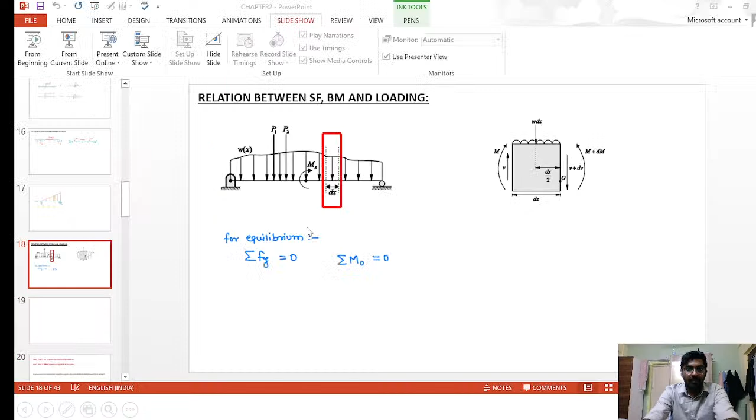You can proceed now. Don't mind. Why?

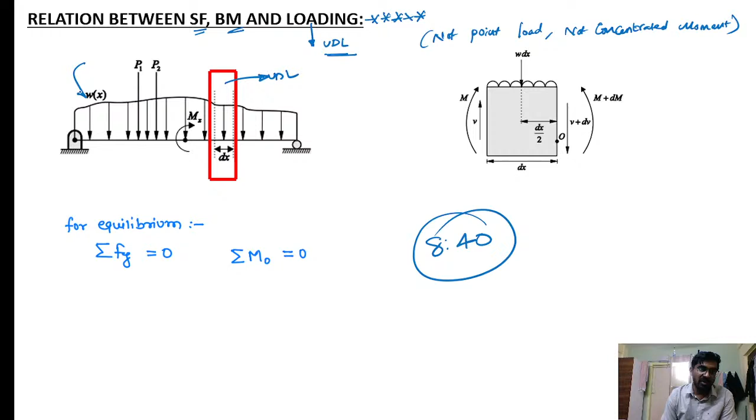I am considering only UDL. I am considering a beam with some load on it - UDL, or some varying load. Let us consider some varying load. In this beam I am considering a small strip, a very small strip, and magnifying it. This is the strip of length dx, subjected to UDL.

What is the total load? Total load is nothing but W into intensity of loading into length. What is the length of the strip? dx. Where will it act? It acts at the CG, at a distance of L by 2. Here what is L by 2? The length here is dx, therefore dx by 2.

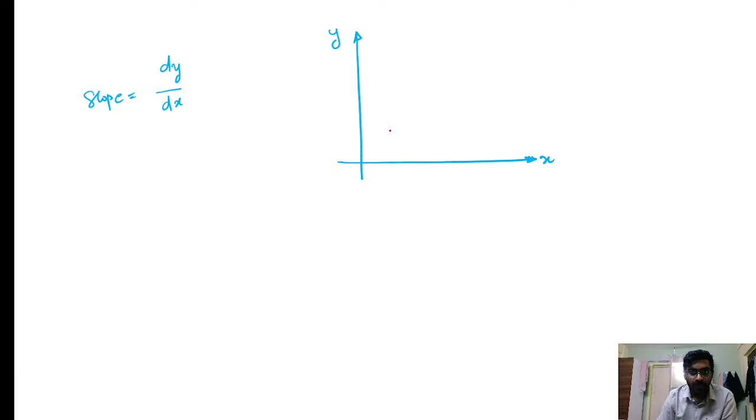If you consider any curve in the xy plane, with this as x direction and this as y direction, if you consider any curve, some function of x, the slope of the curve at any point with respect to the horizontal, this slope theta equals dy by dx. In the denominator we have x, so we are measuring the angle with x, which is nothing but horizontal.

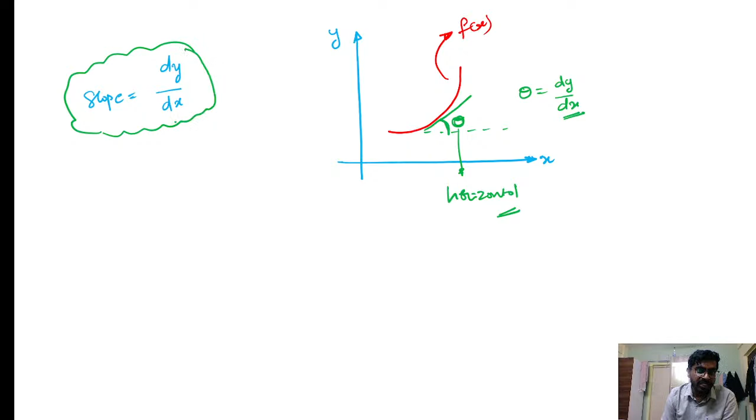So slope is indicated by differentiation. Differentiation indicates slope, integration indicates area under the curve. For the same curve, if I integrate from x1 to x2, if this is x2, integrating the function f of x from x1 to x2 gives the area under the curve - this area. So this is the meaning of integration: integration of any function gives area under the curve, differentiation of any function gives slope at a particular point. This is the meaning of differentiation and integration.

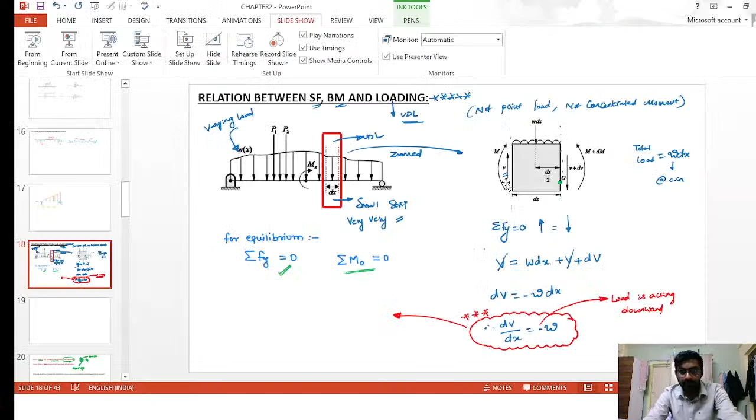Now what are we considering? We are considering the moment about O should be equals to 0. Why it should be equals to 0? Because beam is in equilibrium position, therefore it should satisfy the equilibrium conditions.

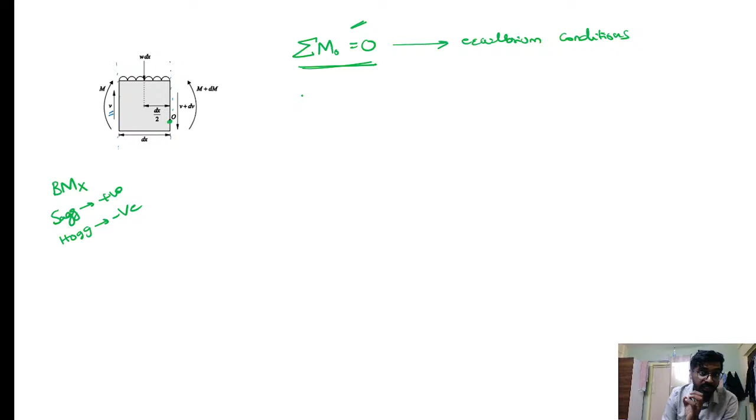Whenever I am taking moment equals to 0, if I am calculating moment at a section, bending moment at a section, then I should consider sagging moment as positive. Whenever I am considering moment equals to 0, I should take anti-clockwise negative, clockwise positive.

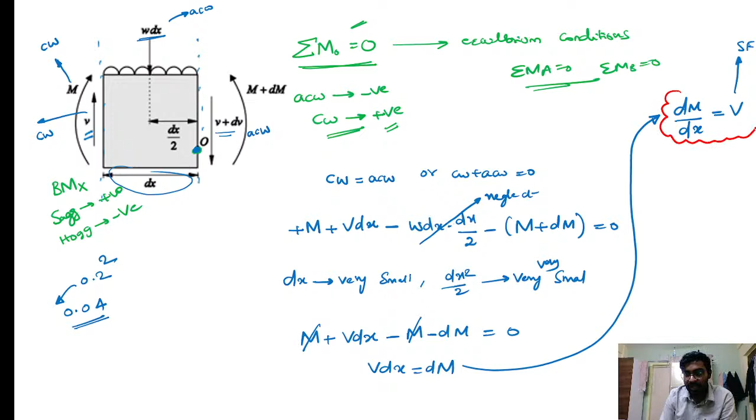This is also very important equation. Let's see what this signifies.

dM by dx, nothing but slope of bending moment diagram, is equals to magnitude of shear force. This is nothing but slope of bending moment diagram is equals to magnitude of shear force.

These two conclusions say: slope of shear force diagram is equals to intensity of distributed load, and slope of bending moment at any section is equals to shear force at that section.

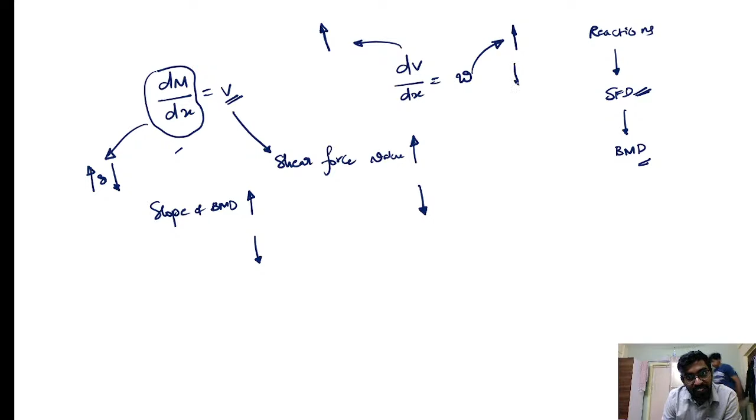Similarly, if load value is increasing, definitely slope of shear force diagram should also increase. If load value is decreasing, slope also should decrease.

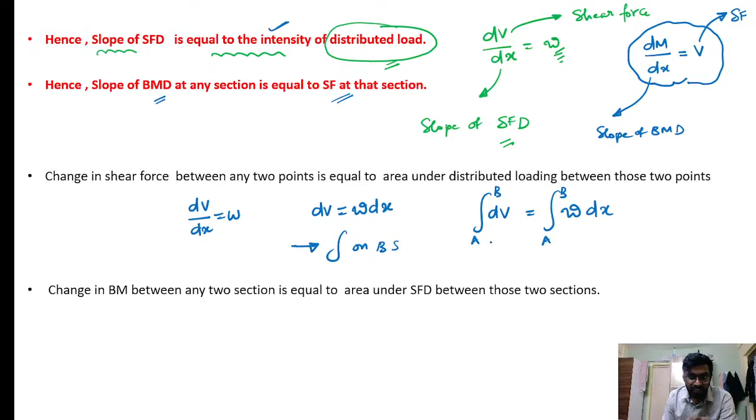Observe, distance of L by 2. This is point A, this is point B. Integral A to B dV is equal to integral A to B W into dx. This is nothing but VB minus VA is equals to integral A to B W into dx.

This is the area of loading diagram between A to B. Area of loading diagram is nothing but, what is the area of loading diagram between A to B? W into L by 2.

And what is the shear force value at B? WL by 2. What is the shear force at L by 2? 0 minus 0. Therefore WL by 2 is equals to WL by 2.

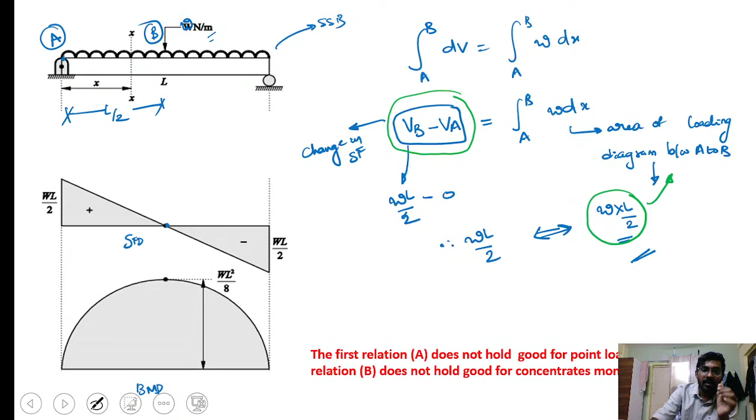I'll explain. First, I am considering the 2 points. This is A, this is B. B is at a distance of L by 2.

What do I mean? Integral dm from A to B is equals to integral V dx from A to B. This is the area of shear force diagram between A and B. This is the A point, this is the B point, this is the triangle.

Therefore what is the area? Half into base into height. What is the base? Base is nothing but L by 2, into, what is the height? WL by 2. Finally we are going to get WL square by 8.

This is the difference MB minus MA. What is the moment at A? 0. What is the moment at B? WL square by 8. I'll explain how this value came.

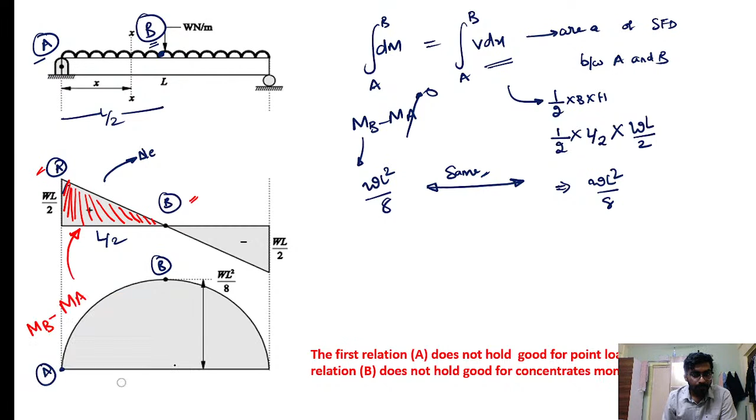Okay, so these above relations A and B does not hold good for point load and the concentrated moment. These two equations will be valid only for uniformly distributed load.

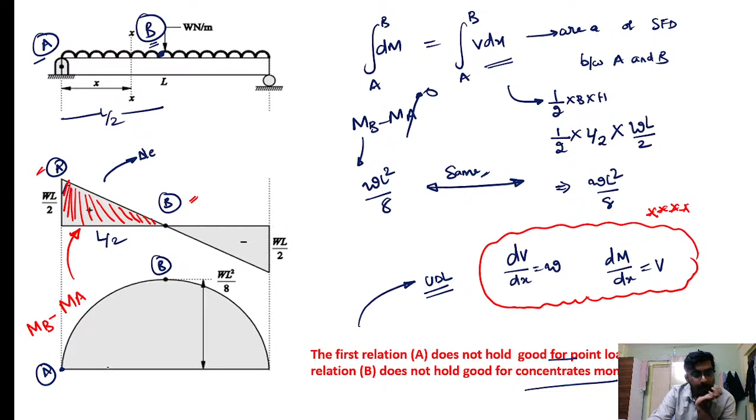dv by dx is equal to intensity of loading. What is the intensity of loading here? Intensity of loading is constant. W is constant throughout the beam.

If loading is like this, intensity of load is increasing constantly, increasing uniformly or varying uniformly. But here intensity of loading, if you consider anywhere, here also W per meter, anywhere intensity of loading is W per meter. So therefore this is constant.

Therefore slope of shear force diagram must be also constant. See, when does a constant slope occur for us?

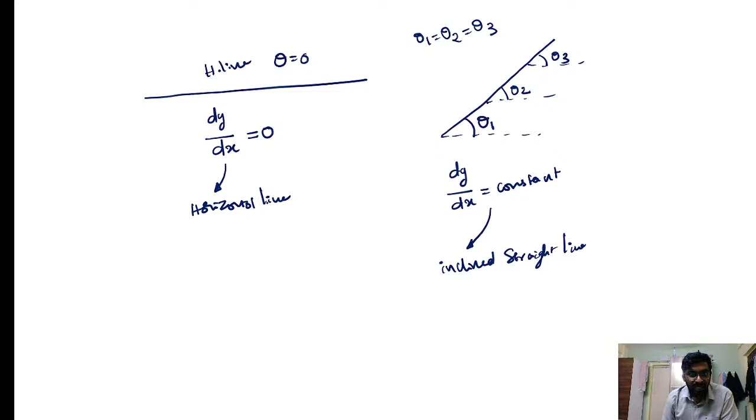Therefore slope of this line, for example, if this is constant, slope is constant, then it indicates an inclined straight line. If slope is 0, then it indicates a horizontal straight line.

For example, if slope is changing, dy by dx, if this is rising, this is the positive constant. If here theta 3, here theta 2, here theta 1, theta 1 is equal to theta 2, therefore this is also constant slope but negative. Negative indicates falling, positive indicates rising.

And if dy/dx is not constant, for example if it is changing, then it should be a curve. If I consider one curve, this curve is making an angle with horizontal of some theta 1. Here it is making some angle theta 2. Here it is making some angle theta 3. Theta 1 is not equal to theta 2 is not equal to theta 3.

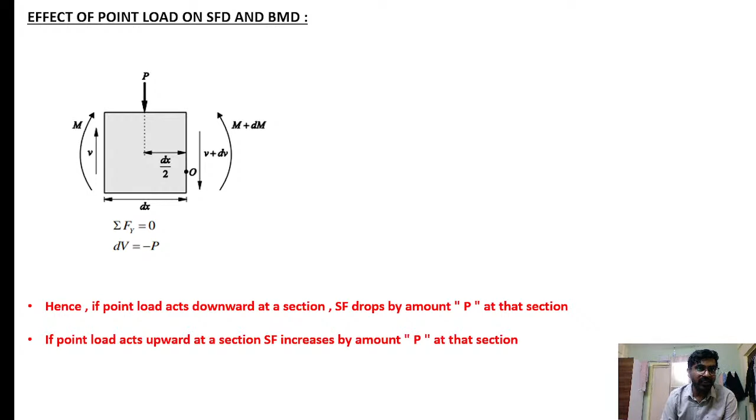From the same beam, I am considering a small element dx, but here I am applying a point load. So whenever we apply transverse loading, shear force and bending moment develop. Whenever we change the section, bending moment also changes. Since I don't know the change, I assumed it as dM; shear force also changes, and since I don't know how much it changes, I assumed it as plus dV. If I consider sigma Fy equals 0, that is downward forces equals upward forces.

What are the upward forces? V. What are the downward forces? P plus V plus dV. V gets cancelled. dV is equal to minus P.

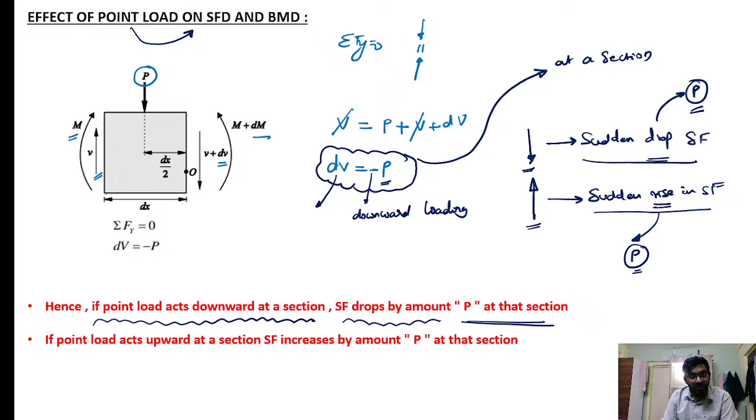Whatever is the point load acting at that point, the magnitude of rise or fall should be equal to the magnitude of the point load acting at that point. This is the effect of point load on shear force diagram - that's done. Now we are going to study the effect of point load on bending moment diagram.

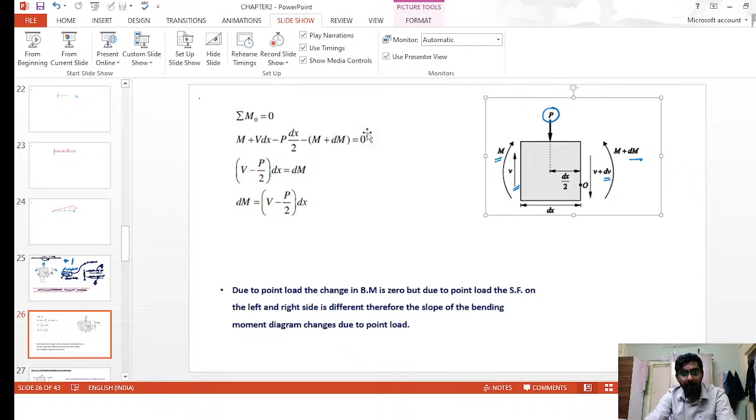I am taking moment about point O to be 0. This is the point O. This M is acting in clockwise direction. This V is also causing a moment in clockwise direction. This P is causing a moment in anti-clockwise direction.

This M plus dM is also causing a moment in anti-clockwise direction. So finally, the equation becomes: since M is acting clockwise, I am considering plus V into dx minus P into dx by 2 minus M plus dm equals 0.

Why am I not considering the effect of this shear force V plus dV? The shear force is acting through the point O, so therefore the perpendicular distance is 0. Therefore I am ignoring this V plus dV.

If I simplify this: M plus V dx minus P dx by 2 minus M minus dm equals 0. M gets cancelled. V minus P by 2 into dx equals dm. As dx value is very small, I am neglecting this. Therefore finally I get dm is equal to 0.

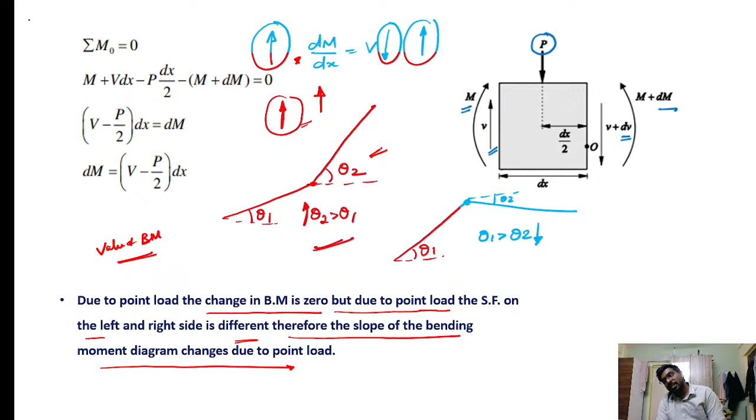Now let us study the effect of concentrated moment on the shear force diagram and bending moment diagram. See, let us assume the same section, but now it is subjected to some concentrated moment M naught in a clockwise direction. So due to the moment, some shear force and some moment will develop.

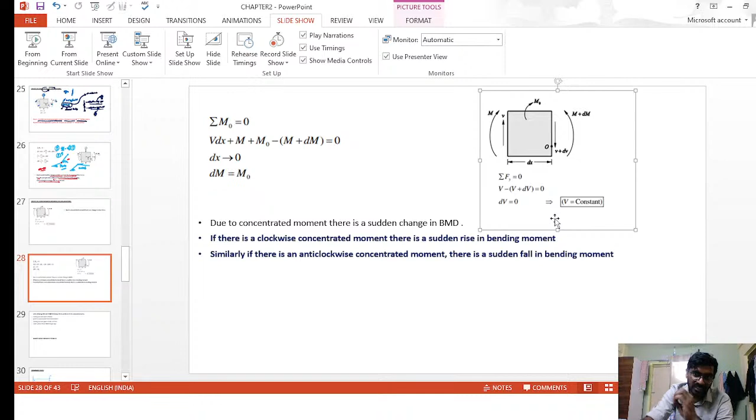See, these derivations are not at all important. Whatever conclusion we are getting finally is very important to draw the shear force and bending moment diagrams.

See, I am considering the moment about point O is 0. Let us take anti-clockwise moments as negative and clockwise moments as positive. This M is clockwise, this M naught is clockwise, this is anti-clockwise, this is causing clockwise moment, but the perpendicular distance of V plus dV is 0.

Perpendicular distance is 0, therefore it is not causing any moment. Considering moment about point O to be 0: this is causing clockwise moment, so plus M, this is causing plus clockwise moment, so plus V into dx, and this is also clockwise plus M naught, this is anti-clockwise minus M plus dm is equals to 0. Therefore M minus M will get cancelled. V dx plus M naught minus dm is equals to 0. As dx is very small, I am ignoring this term. So finally, dm is equals to M naught.

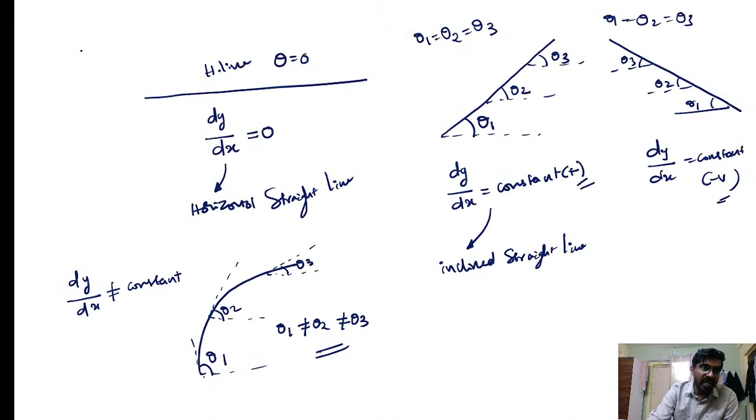First conclusion is slope of shear force diagram is equal to intensity of loading. What is the second conclusion? Slope of bending moment diagram is equals to magnitude of shear force.

And due to point load there is a sudden rise or sudden fall due to upward point load. This is due to downward point load. How much rise, how much fall happens - that fall will be equals to P due. So there is a sudden rise or fall in shear force diagram.

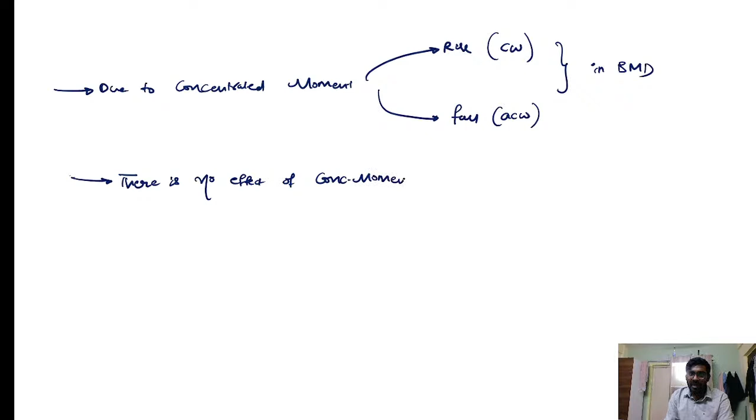There is no effect of bending moment due to point load, and due to concentrated moment there will be sudden rise or there will be sudden fall. This is due to clockwise moment, this is due to anti-clockwise moment in bending moment diagram, and there is no effect of concentrated moment on shear force diagram.

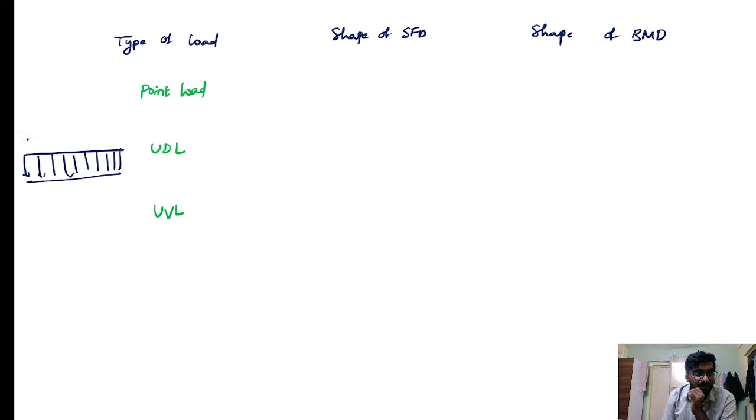See, UDL - what is UDL? This is a constant line, so it's constant. So what is the degree? Y is equals to... let me say it like this. What is the equation of this line? X is equal to 0. What is the equation of this line? Y is equal to 0. So for us, UDL is also a straight line, so this degree can be remembered as 0.

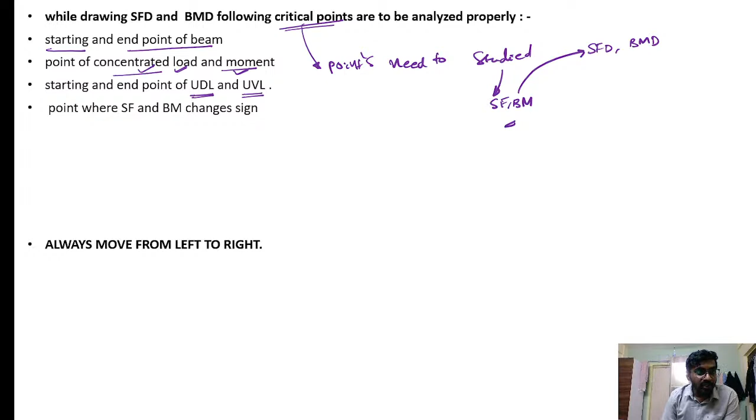Also starting and ending of UDL and UVL, and also the point where shear force and bending moment changes sign. This point is used to find where the bending moment is maximum.

It will also help us to find the point of contraflexure and point of inflection. How, we will discuss all these things in the problems.

You just note down: always move from left to right, left to right.

If a force is acting upward, then shear force is positive. If a force is acting downward, shear force is negative. If a force is acting upward, it will cause sagging moment, and sagging moment is positive. If a force is acting downward, it will cause hogging moment, and it is negative. These are the sign conventions.

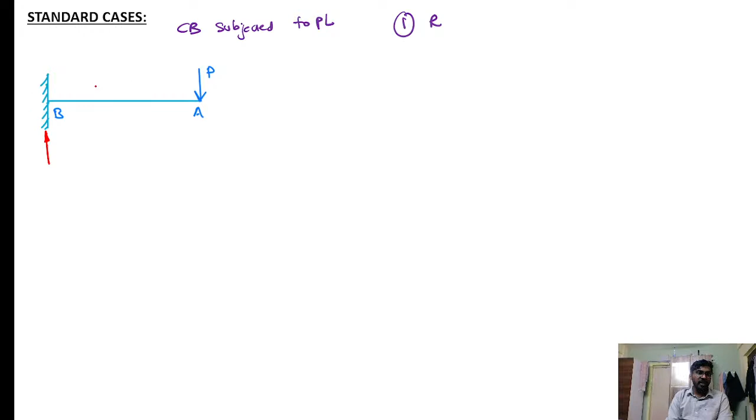Horizontal reaction will be 0, because there is no horizontal loading. This P load will try to cause the moment in this direction, so reaction should develop to oppose the moment developed.

This is the moment reaction, this is the vertical reaction. First step will be determining the reaction. Let us consider sigma Fy equals 0, this is the y direction, this is the x direction. Downward forces equal upward forces. What is the upward force? Reaction at B should equal the downward force P. Therefore vertical reaction at B equals P.

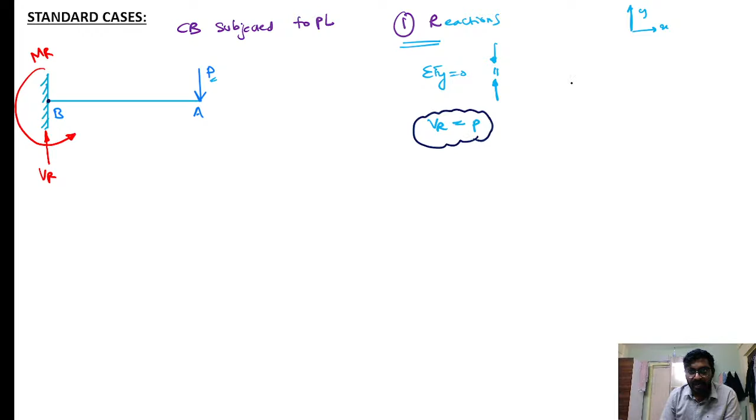To determine the moment reaction at B, I am taking the moment at B to be 0.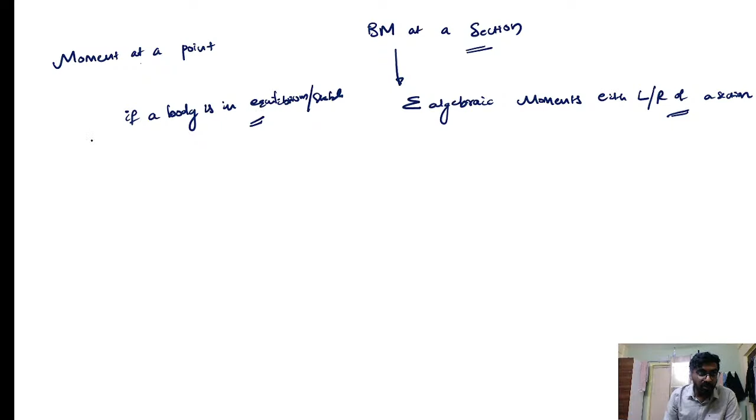What is the bending moment at a point? If a body is in equilibrium, if a member is stable, meaning it doesn't move left, right, top, bottom, and doesn't rotate, then that body is in equilibrium. For an equilibrium body, moment at a point should always be 0.

So this will consider all the forces causing the movement, and clockwise moments are considered positive, anti-clockwise moments are considered negative. But whenever we discuss bending moment at a section, we consider only either left of the section or right of the section. So this is the difference between bending moment at a section and bending moment at a point.

Now I am considering bending moment at point B to be 0, then clockwise moments. Why am I considering the beam is in equilibrium? Whenever the beam is in equilibrium, wherever you take, moment at a point should be 0. So clockwise moments

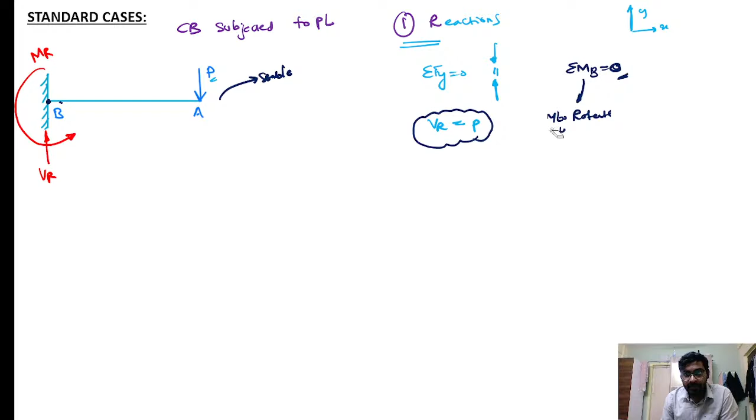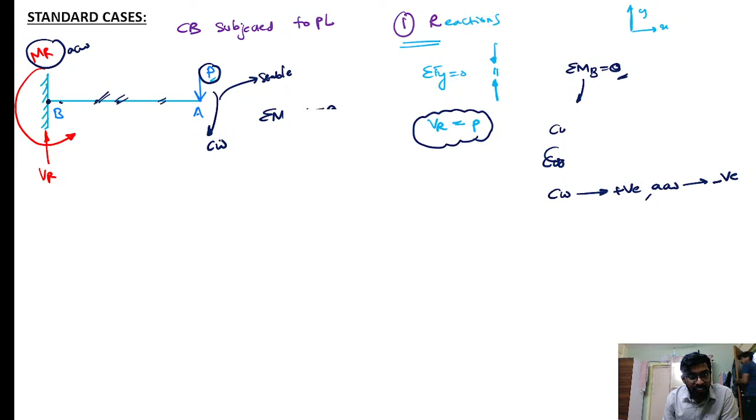positive, anti-clockwise moments negative. This P is causing clockwise moment, and this moment of resistance is in anti-clockwise direction. Therefore, what is the clockwise moment? P into the length, this is the length L. So clockwise moment P into L is equal to anti-clockwise moment of resistance. Therefore, moment reaction at B equals P into L.

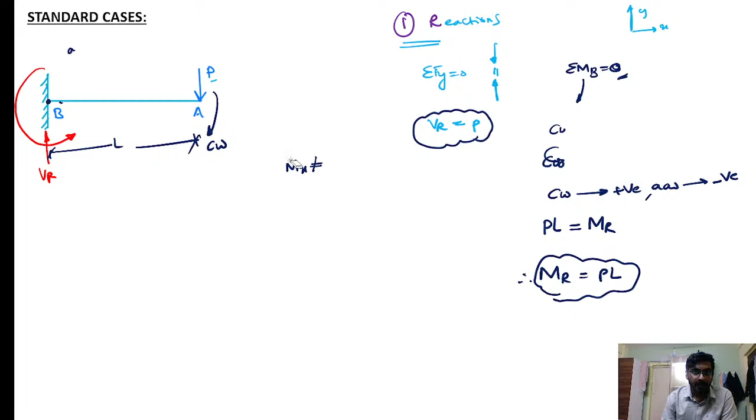This is the reactions. What is the value of vertical reaction? The value of vertical reaction is P. Moment reaction is equal to P into L.

Now, how am I going to draw the shear force diagram and bending moment diagram? At the starting point, we determine the reaction values and bending moment values. At the point load, at critical points, bending moment is discussed. Let me show how I am going to draw the shear force diagram and bending moment diagram.

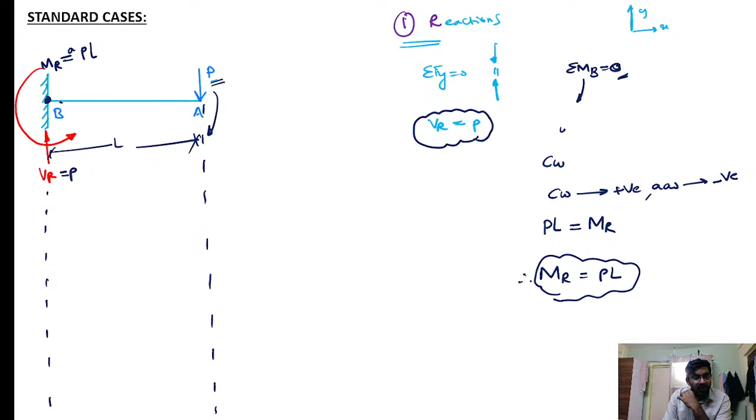Let us consider this a reference. Shear force is 0. Will there be any effect of concentrated moment on the shear force diagram? No, there is no effect of concentrated moment on the shear force diagram. But at point B, there is a vertical reaction acting upward, therefore the shear force diagram will rise.

What is the rise value? What is the magnitude of the load? P. Therefore, the rise is also P. From B to A, is there any load? No load between point loads. Therefore, there will be no change in shear force, so the shear force will be constant.

At point A, point load is acting downward. Due to this downward point load, shear force should fall suddenly. What is the fall? It should be equal to P. Therefore, it falls suddenly and becomes 0. This is the positive shear force diagram.

Now let's see how I am going to draw the bending moment diagram. This is the reference where bending moment is 0.

See how I am going to draw. What is the direction of the moment acting at point B?

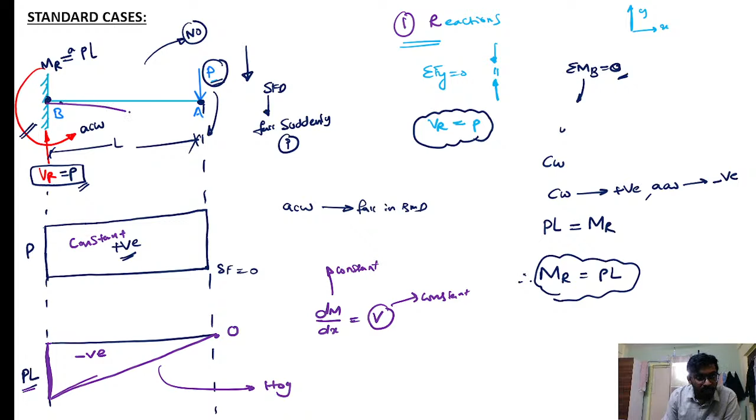So this is the negative bending moment. Negative bending moment will indicate what? Hogging. See, this beam is trying to hog. Therefore, bending moment is also negative, and negative bending moment is hogging. This is the way how we are going to draw shear force and bending moment diagrams.

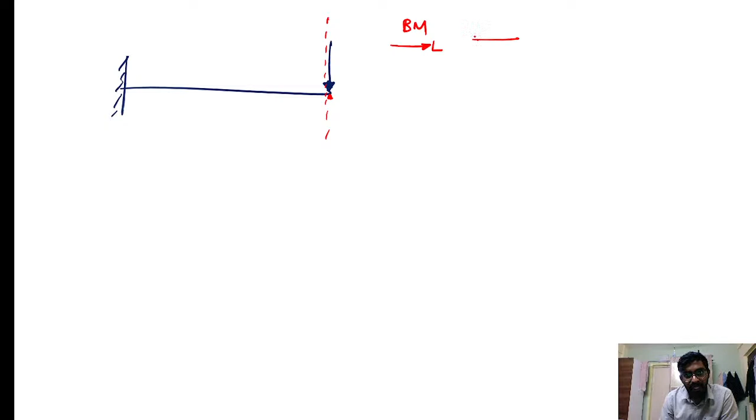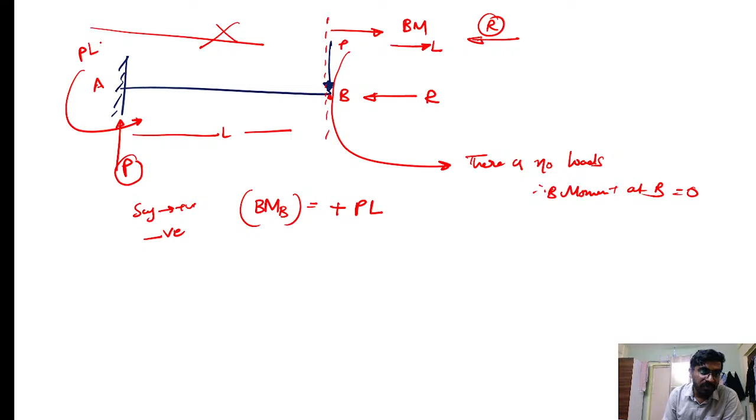See, I told you, whenever you are coming from left to right, an upward force will always cause a sagging moment that will be positive. P into, what is the distance? The distance is L, therefore PL. This PL moment reaction will try to cause the hogging bending moment. Therefore, I am taking minus PL. Therefore, bending moment at point B is 0. Therefore, always bending moment at the free end should be 0.

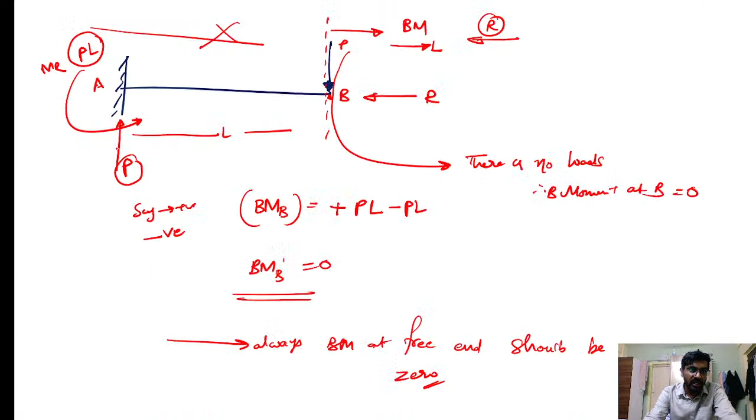You remember this? So from the next problem onwards, I am going to take directly bending moment at a free end should be 0. See, let us observe the next case, next example.

See, what are the reactions developing? Here is one vertical reaction, and this loading will try to cause the movement in clockwise direction. So the reaction should develop. Reactions always develop to oppose the effect of loading. The effect of loading is causing clockwise movement. So reaction should develop anti-clockwise to counteract the effect of loading. Therefore, this is the reaction.

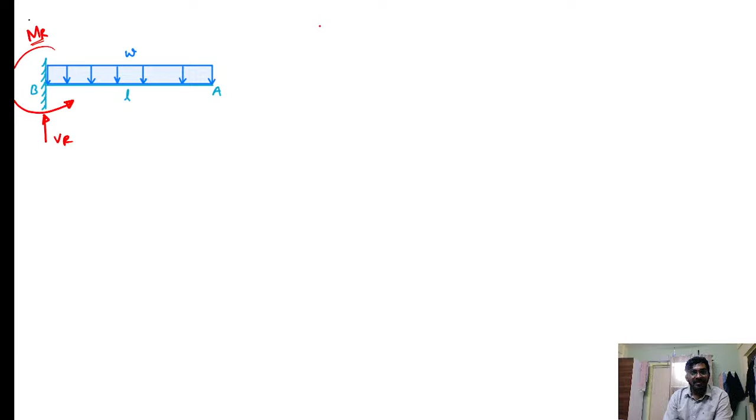Moment develops MR, a reaction. This is the moment reaction, and this is the vertical reaction. So to calculate the reactions, sigma Fy is equal to 0. Upward forces must be equal to downward forces. What is the upward force? VR. So upward force VR equals to the total downward force, that is equal to the area of UDL. What is the area of UDL? Intensity of the loading into length. Therefore, vertical reaction is equal to W into L.

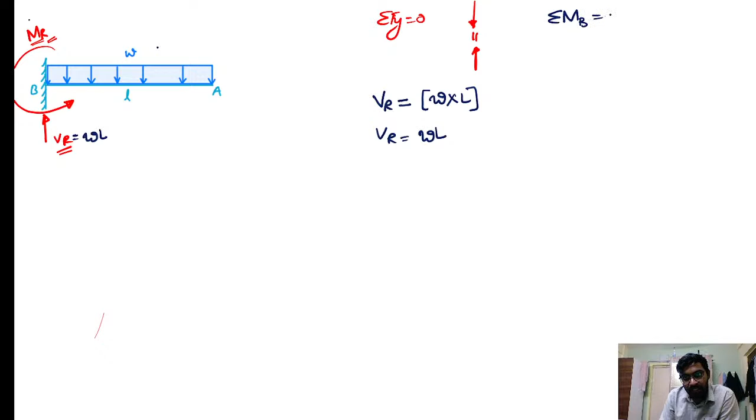Let us consider this. This is acting in anti-clockwise direction. This load is causing clockwise movement. What is the clockwise movement? What is the total load? W into L. This total load will act at the CG.

This distance will be at a distance of L by 2. Why it is L by 2, I already discussed in the previous class. So I am taking it as L by 2.

This is plus, so this reaction is acting anti-clockwise. So I am taking minus MR equals to 0. So moment reaction is equals to WL square by 2, which equals WL square by 2. See how I am going to draw the shear force diagram and bending moment diagram.

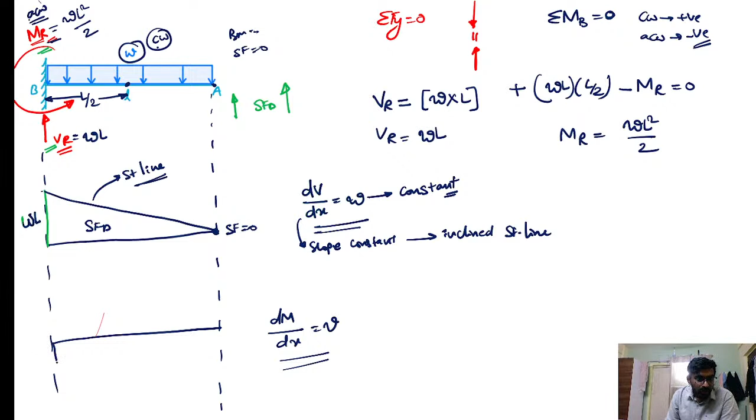Now let's see the shape of the bending moment diagram. A concentrated moment is acting at point B, which is acting in anti-clockwise direction. So there should be a sudden fall of magnitude WL square by 2.

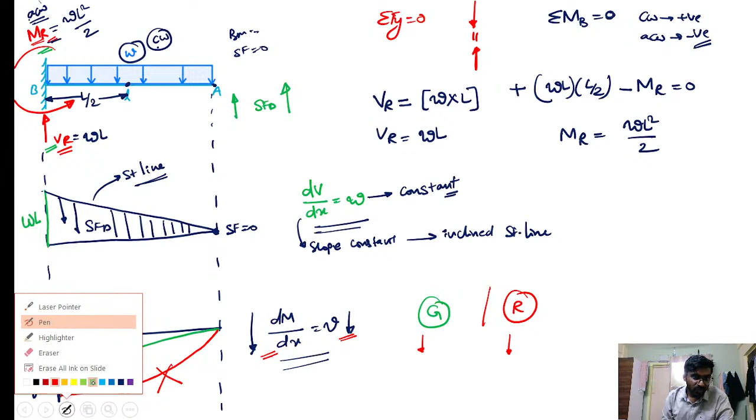So green one is the correct answer. Red one is the wrong one. I'll explain why it is wrong, see.

So, see, if a curve is like this and if a curve is like this, I am moving from left to right, moving from left to right.

See, always to measure a slope, first we should draw a tangent and you should draw a horizontal line. This is the slope. If I draw a tangent here, this is the tangent.

If I draw a tangent and if I draw a horizontal, this is the slope. If I draw a tangent, this is the slope, finally it is becoming 0. If I draw a tangent here, this is the slope: theta 2, theta 3, theta 4.

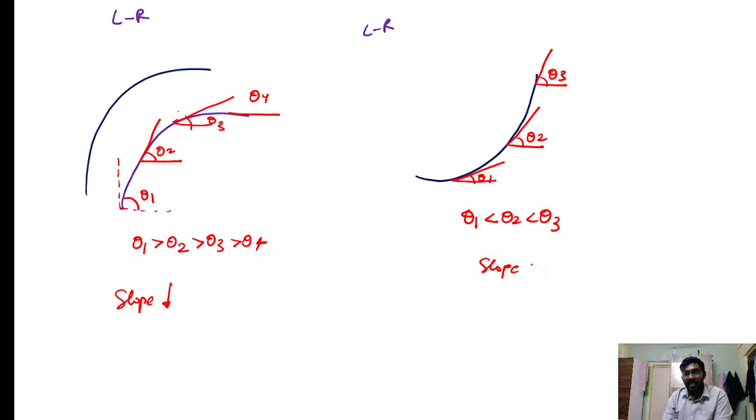So here if you consider, see this is the tangent, this is the horizontal, this is the slope. If I draw a tangent, this is the slope, almost became 0. So slope decreased from theta to 0 in the green curve. In this curve here, theta slope is 0, here slope is having some value. Here the slope is increasing in this curve. So therefore red curve is not our curve, green curve is our curve.

Is it clear? Why the green curve is correct, why not the red curve.

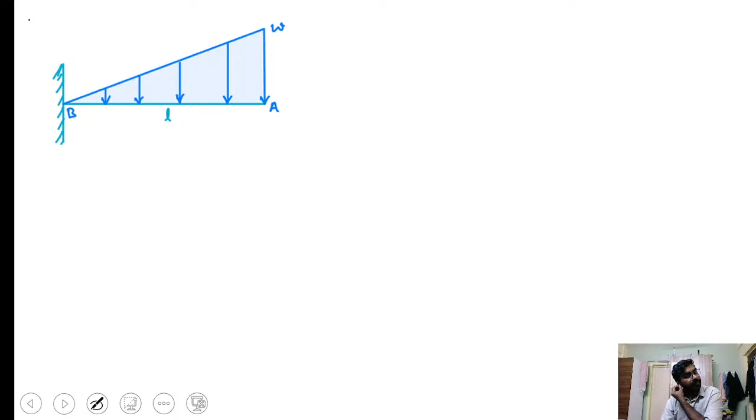You just keep this on hold, I'll discuss this also. Time is less, so I'll discuss the point load, simply supported beam.

See what are the reactions here. Horizontal reaction will come into the picture, but there is no horizontal load on the beam, therefore horizontal reaction should be 0. And I told you in the earlier class, if a beam is subjected to symmetrical loading, then

reactions are equal to total load by 2. Here total load is P, so the reactions are P by 2 each. And one more thing you remember: when there is no loading between any two sections, the shear force line should remain horizontal. Let me explain how: if dV by dx equals the intensity of loading, and if loading is 0, then slope should be 0. If slope is 0, then the line should be horizontal.

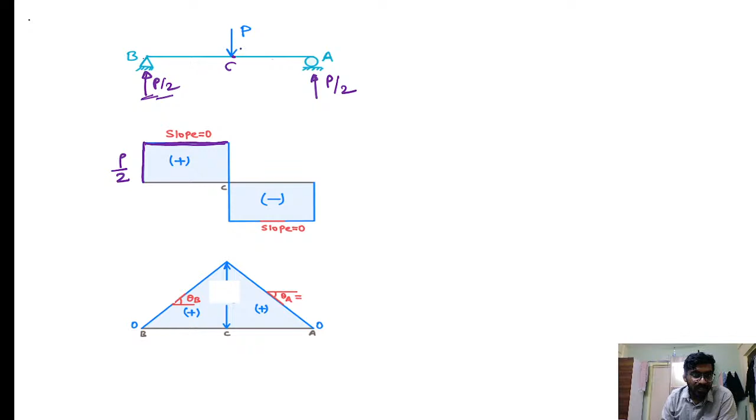See, from B to C, there is no loading, therefore the line should remain horizontal. See, at point C, what is the load? Point P is acting downward, therefore shear force diagram should fall. Therefore shear force diagram should fall by an amount equal to P.

See, already, or otherwise, if you want, take the section here. You take the section here. So if I take the section XX, shear force at X just left of the section: when we take just left of the section, what are the forces acting? Only P by 2, which is acting upward, therefore plus P by 2. If I consider shear force at the section just right of this, what are the forces acting? Plus P by 2 and minus P, therefore finally minus P by 2.

See, here it is the value P by 2 and it will fall by minus P by 2, and there is no loading between C to A, therefore it will remain horizontal. See, finally here an upward force is acting, therefore shear force should rise suddenly by an amount P by 2. Here the magnitude is minus P by 2 and it should rise by plus P by 2. Therefore finally it is becoming 0.

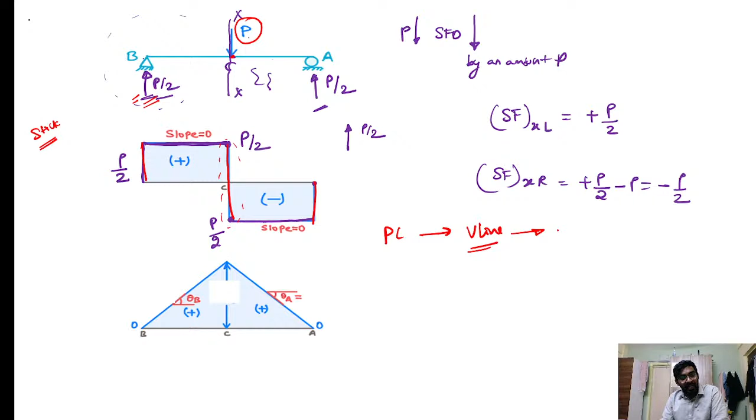Wherever a point load acts, we observe a vertical line in the shear force diagram. So what is the length of that vertical line? The length of the vertical line equals the magnitude of the point load.

Here a vertical line of P by 2 is observed. Therefore, what is the point load acting here? P by 2 is acting. An upward line is observed. Therefore, a vertical reaction of P by 2 is observed.

If I move from left to right, this is the direction. Here a vertical line of P by 2 is acting, or rather a vertical line of P is observed. Therefore, a downward point load of P should also act. So downward point load P is acting. Then a vertical upward line of P by 2 is acting, so we should observe a vertical point load of P by 2.

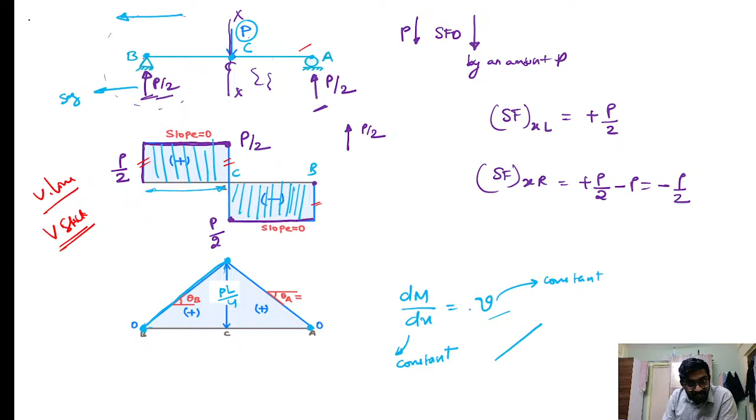From C to B, shear force is negative and constant. Therefore the line should fall. This is the positive slope, this is the negative slope. Therefore the curve is falling.

See what I am saying: wherever there is a point load—this whole beam is subjected to point loads, this is a point load, this is a point load, this is a point load—for a point load, the shape of the shear force diagram is a rectangle, and the shape of the bending moment diagram is a triangle.

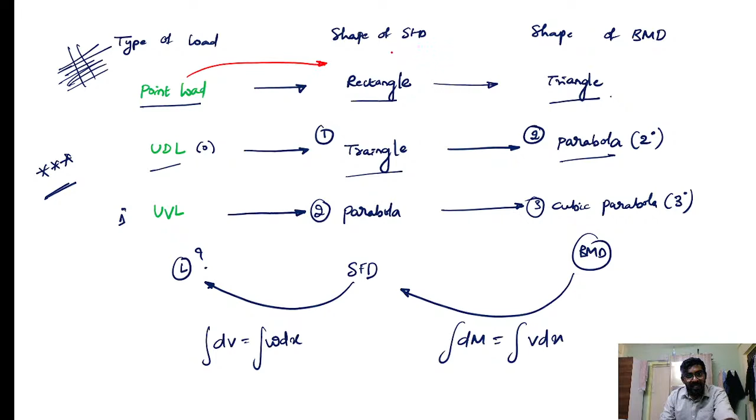Did I mention that point or not? See, for a point load, the shape of the shear force diagram is a rectangle, and the shape of the bending moment diagram is a triangle. Got it? The shape is rectangle—this is rectangle, this is rectangle—but bending moment is triangle. Even if you want, you can observe this in this case.

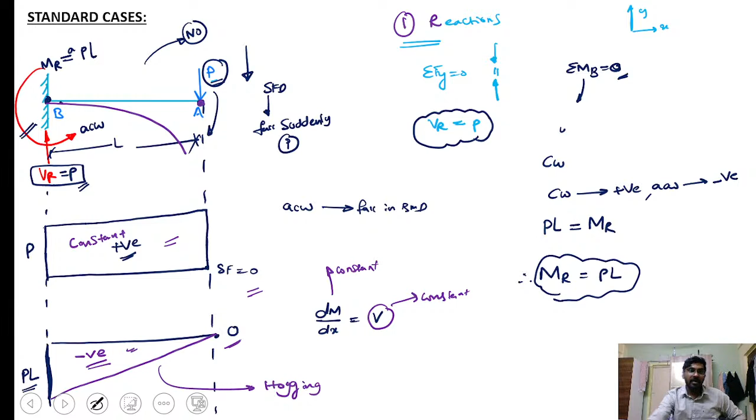For a point load, the shape of shear force is a rectangle and shape of bending moment is a triangle. For UDL, what I mentioned is that the shape of shear force should be a triangle and the shape of bending moment should be a parabola. Check it: for UDL, shape of SFD is triangle, shape of bending moment is parabola, a second degree parabola.

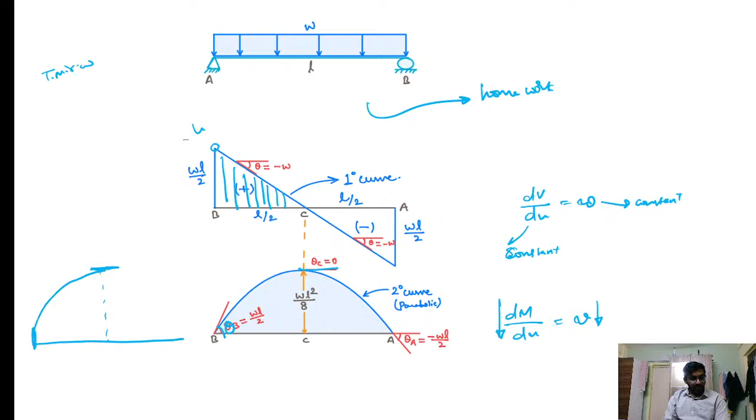Simply put, first you should draw this line. Here shear force value is high, here shear force value middle - in the middle, shear force value is less. So wherever it is high, you draw a perpendicular line. Wherever the value is low, you should draw a horizontal line and try to join the curve. See here what happened - shear force is increasing. If shear force is increasing, slope should also increase. So it increases and reaches maximum value, so draw perpendicular and draw horizontal and join these two things, we will get the curve.